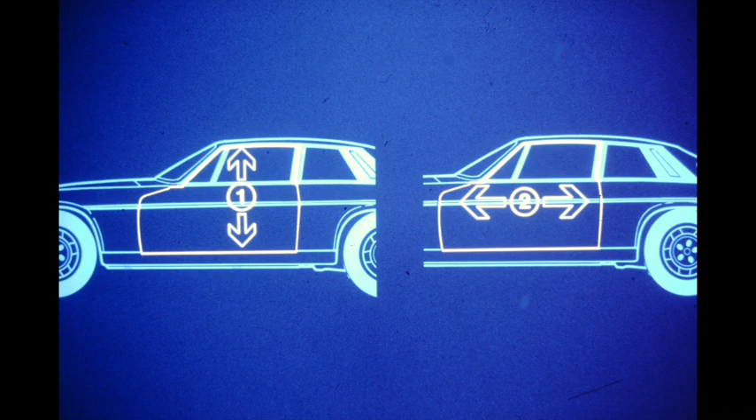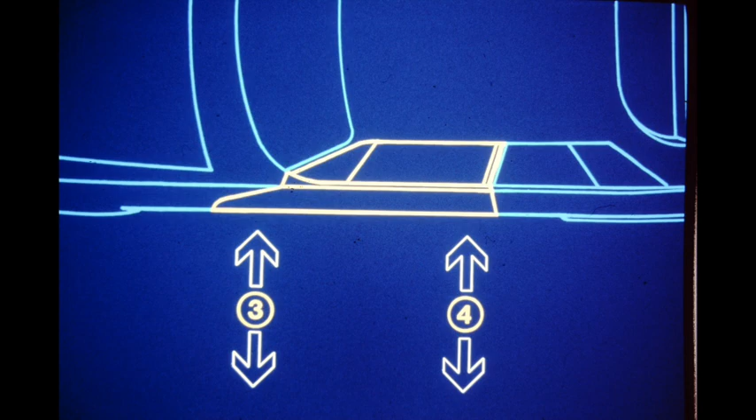Door seal condition and fit should be determined before adjustment. The sequence of adjustment for the panel is the same as that used on the XJ6. Vertical and horizontal positioning is accomplished first. Then the in-out and tilt of the door is set, first at the hinge, then at the striker. Remove the striker to allow freedom of movement. Retain the striker with a wire loop to prevent it from falling into the door post.

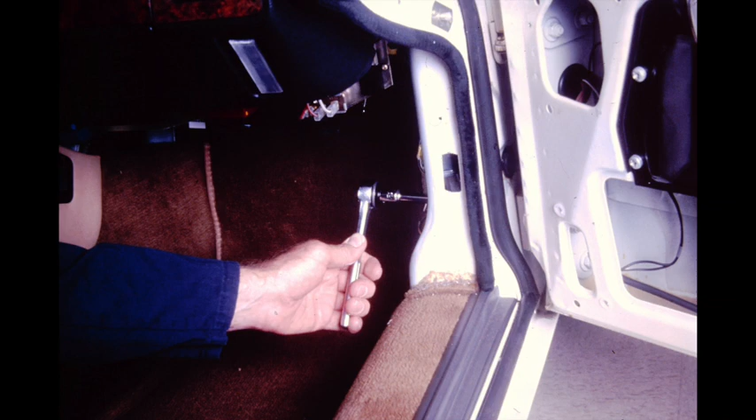Remove the interior kick panel to gain access to the hinge body nuts. Then loosen all 6 hinge nuts. Use a 3/16 inch sheet of wood between the base of the door and the rocker panel to position the door vertically. Then move the door horizontally until there is an equal gap at both ends of the door. Tighten the hinge nuts in this position.

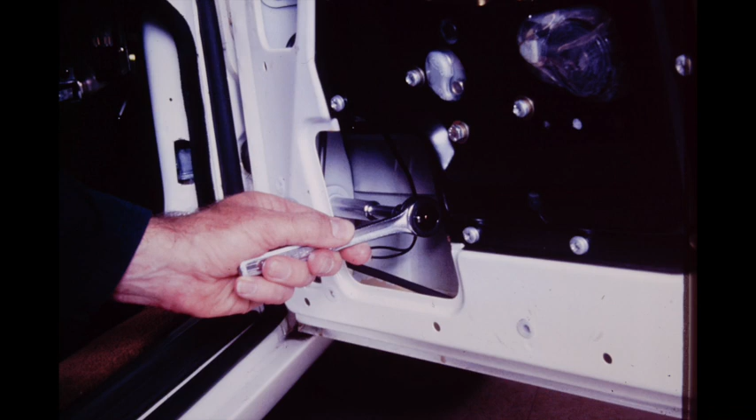Next, remove the door interior panel to gain access to the hinge door nuts. Loosen all 7 nuts, 4 on the top hinge, 3 on the bottom hinge. Adjust the in-out positioning of the front of the door matching the rocker panel and front fender while ensuring good seal contact. Then, tighten the hinge nuts.

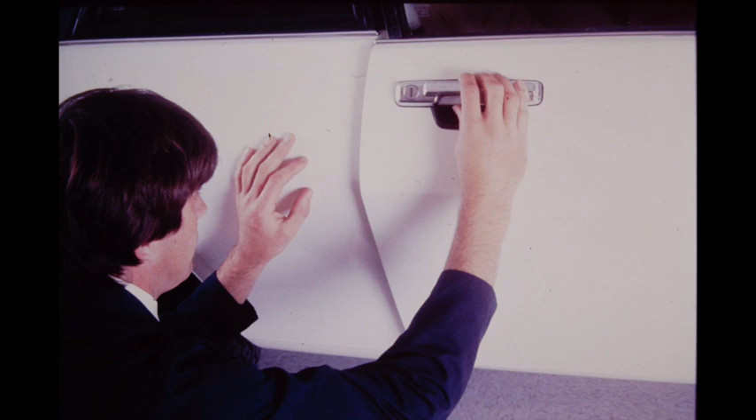Position the rear of the door by first reinstalling the striker and then adjusting by trial and error. The striker is adjusted correctly when there is no excessive opening or closing load, good seal contact, and a match with the surrounding panels.

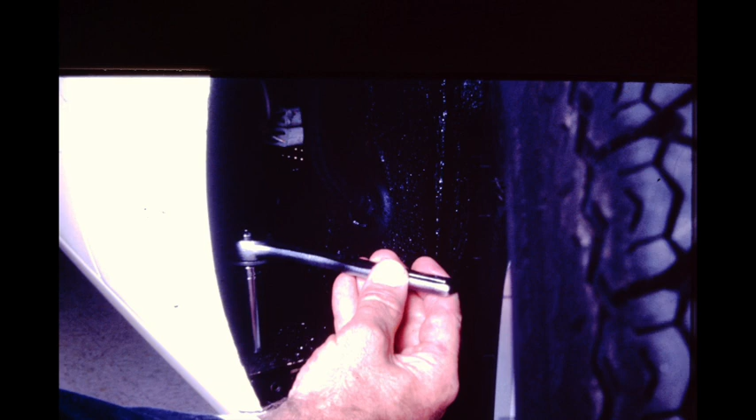Very limited adjustment for in-out positioning at the bottom of the front fender is available for matching the bottom contour of the door. 2 screws situated behind the rear access panel inside the fender locate and secure the fender.

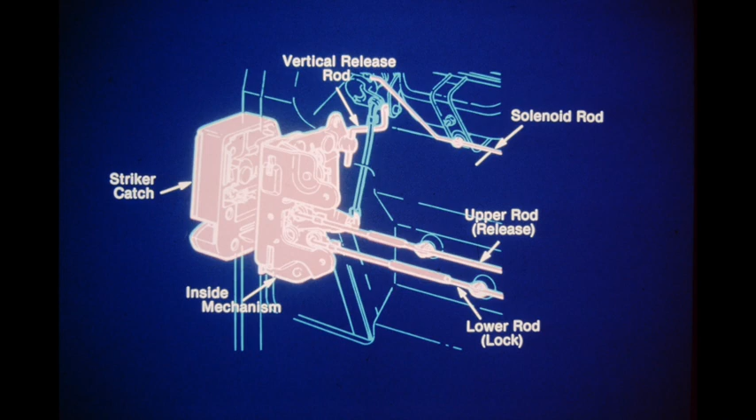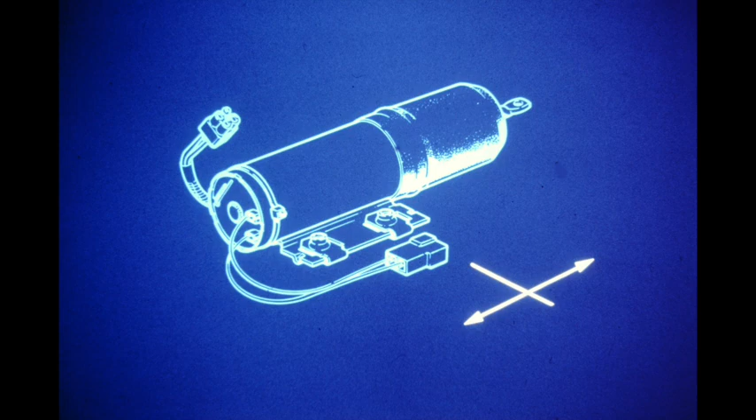Door lock adjustment on the XJS is identical to the XJ6 with one exception. When positioning the solenoid, the key positions are reversed. With the key fully clockwise, move the solenoid full forward. With the key fully counterclockwise, move the solenoid full rearward.

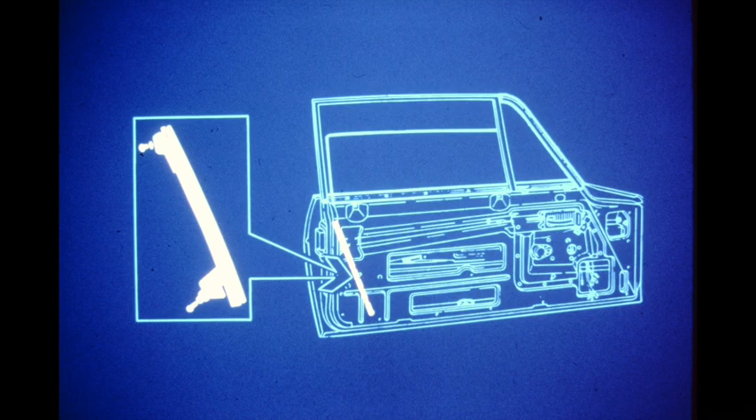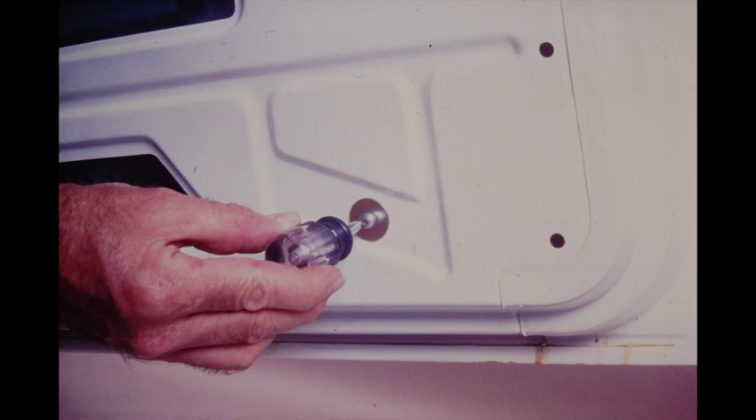Window adjustment is possible to correct for tight or loose fitting glass. Remove the interior door panel and fully raise the glass. Loosen the top and bottom rear channel adjusting screws. Push up on the channel and tighten the top screw. Fully lower the glass and move the bottom of the channel into light contact with the glass. Tighten the bottom screw.

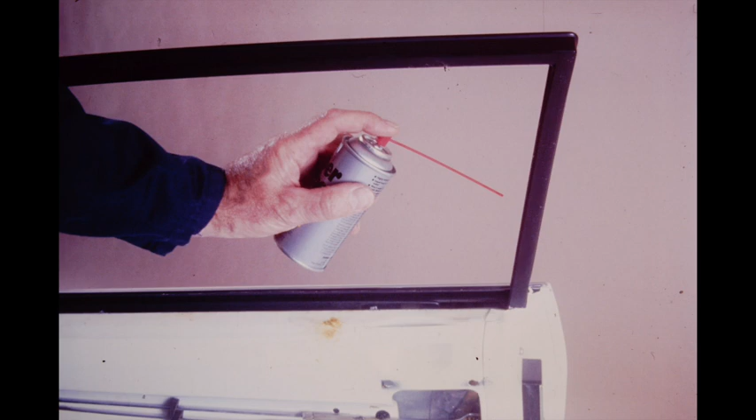Lightly lubricate the window channels with Teflon Super Lube or graphite lockease as required for smooth operation. Then, check the window cycle time. As with the XJ6, 1/2 of a cycle should take a maximum of 5 seconds. Be sure to consider the battery and charging system and the mechanical condition of the window regulator and motor when checking the cycle time.

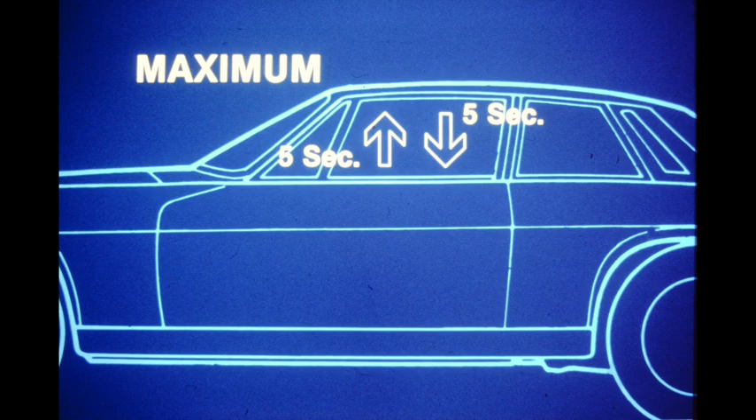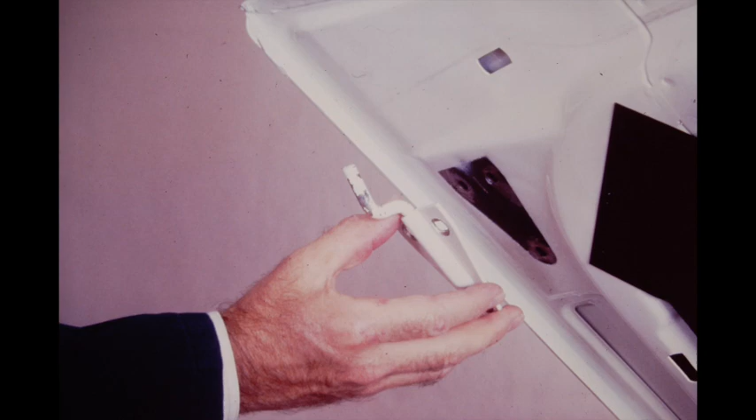Next, let's look at the procedures for adjusting the hood fit. Start by removing both catch pins. Through the grill, carefully loosen all the hood-to-hinge bolts to each hinge. Position the hood vertically and from side to side. When set, tighten the hinge bolts through the grill. Exercise care to avoid damage to the grill.

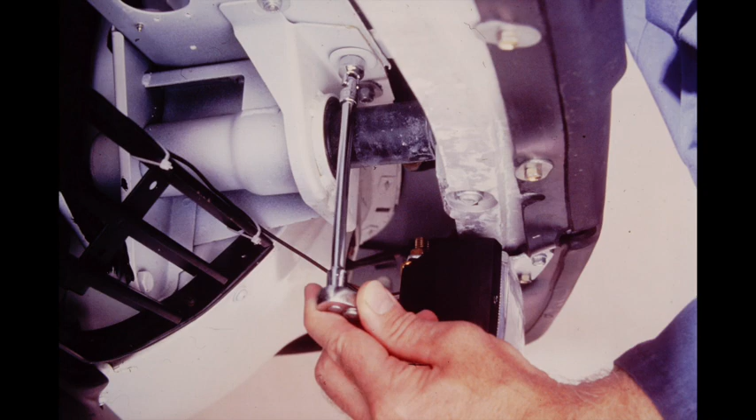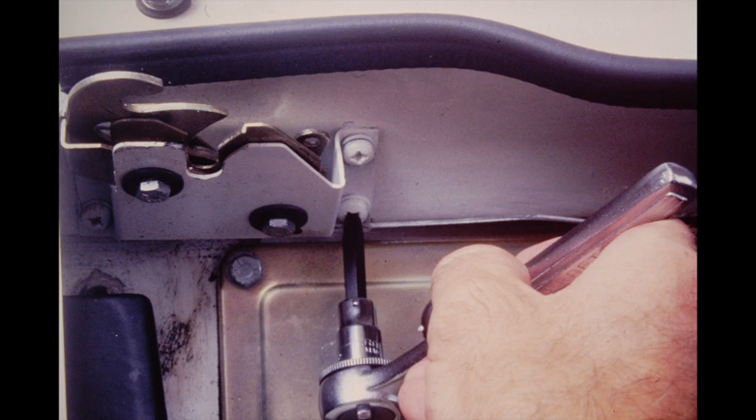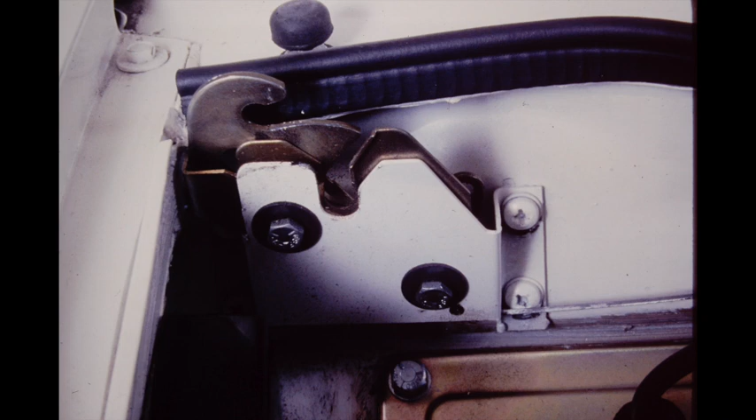Fore and aft positioning is accomplished by loosening the body-to-hinge bolts. Each hinge has 2 bolts. One is accessed from above, the other from below the bumper. Reinstall the catch pins and vertically position the hood at the rear by moving the 2 catch brackets up or down. Besides the 4 catch mounting screws, each catch can be further adjusted by repositioning the mechanism, which is secured by the 2 bolts with the large washers.

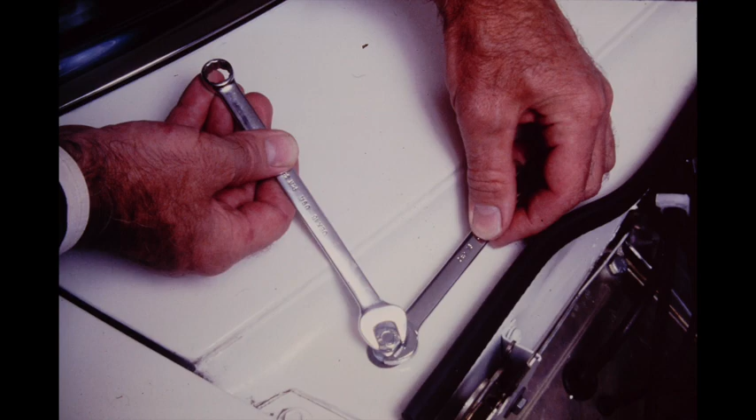Adjust the 2 pins on the hood to align with the catches so that there is no side-to-side hood movement when the interior lever is closed. Adjust the bump stops to eliminate any hood vibration at speed. The release cable adjustment should be checked and reset if necessary. Back off the side-to-side connecting cable first.

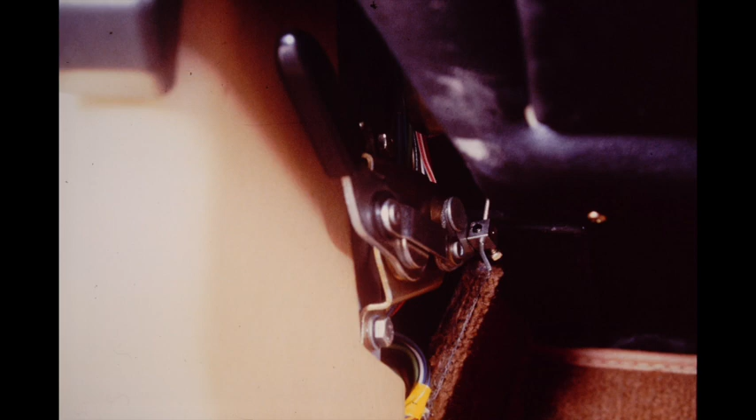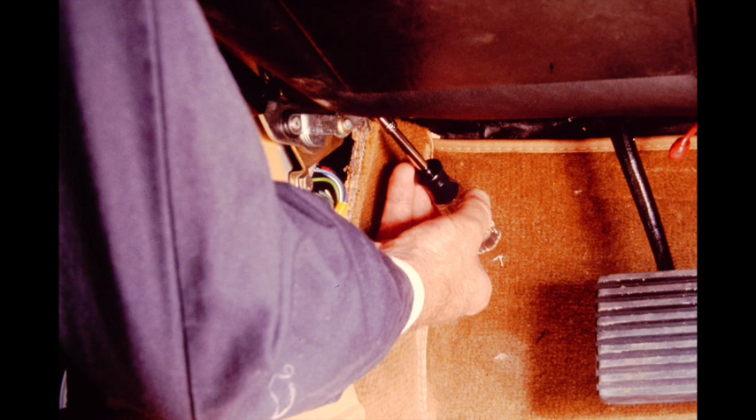With the hood open, set the interior release lever to the fully closed position. Adjust the main cable so that the left catch is fully closed. Then, adjust the side-to-side cable so that the right catch is fully closed. Recheck the rear vertical and side-to-side positioning of the hood and make additional adjustments as necessary. Exercise care during these operations to avoid damage to the finish.

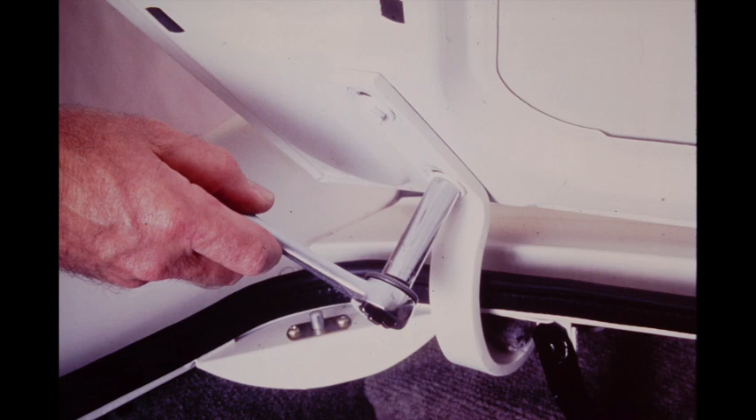As with the XJ6, trunk lid adjustment is best accomplished with the aid of a helper inside the trunk to loosen and tighten the hinge bolts while the exterior panel is positioned. Fore and aft and side-to-side positioning is set by loosening the trunk to hinge bolts. Front up and down positioning and tilt is adjusted by loosening the body to hinge bolts.

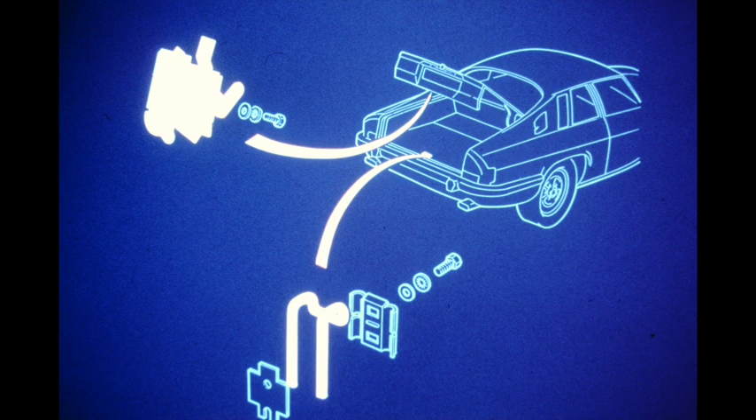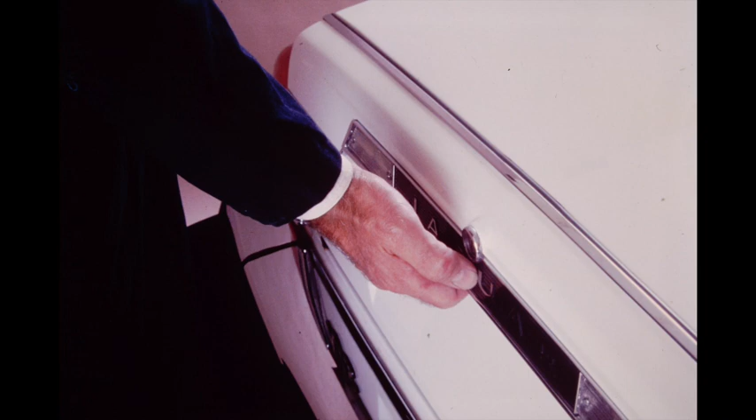Rear up and down positioning and release pressure is set identical to the XJ6 procedure. Adjust the striker and the catch mechanism and position the latch rod in one of the available holes to achieve trunk release at approximately 1/2 of the release lever travel.

A sophisticated electrically powered sunroof has recently been introduced as an option on the XJS. The tinted glass panel can be positioned in 2 ways: the normal open and closed, or rear pop-up. Inside the car, a manually operated sunshade can be positioned as desired. All the roof panel functions are controlled by a single switch located on the center console.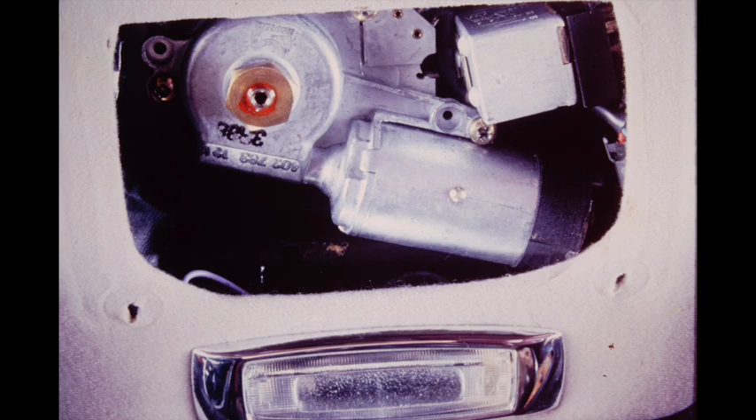The harness is routed up the right A post to the motor, limit switches, and the step relay assembly located under the headlining cover panel next to the rear view mirror. Adjustment to the sunroof panel is possible to correct for vertical front, rear, and side fit. Both sides should be even with the roof line. The front of the sunroof panel should be positioned 1 millimeter below the roof line, and the rear should be positioned 1 millimeter above the roof line when the panel is fully closed.

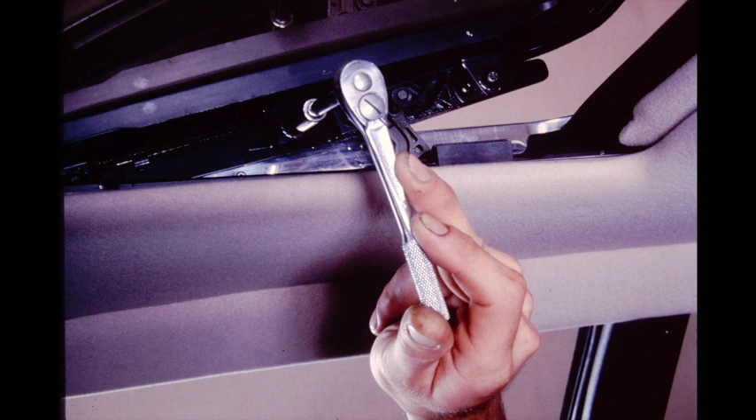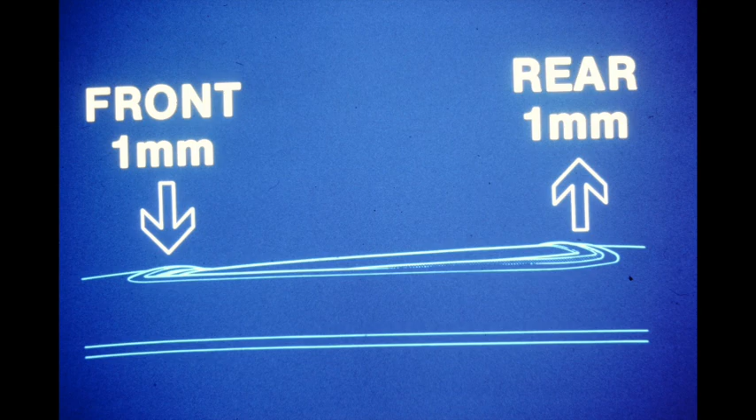Position the sunshade to full open and motor the sunroof rearward for access. Remove the finisher panel securing screws and move the finisher rearward. Then motor the sunroof to the full closed position. Loosen the 3 screws at each side of the panel and make the necessary adjustments as observed earlier. The panel is shown here at full tilt for clarity. After tightening the screws, recheck the fit and make further adjustments as necessary.

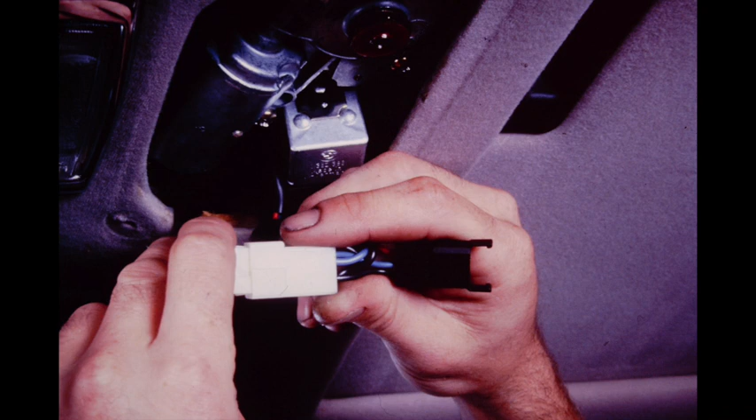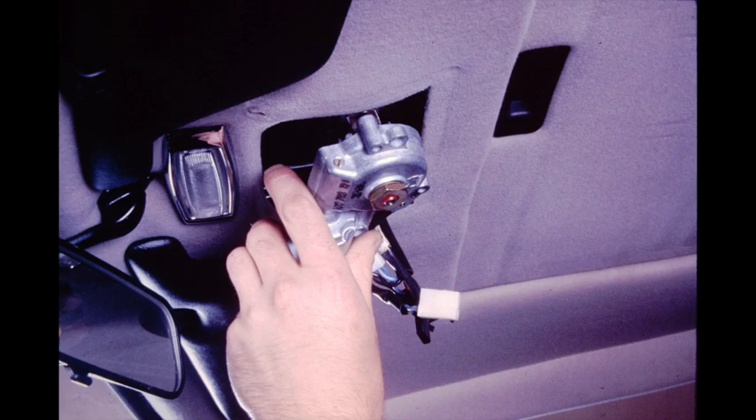This same procedure is used for removing and replacing the sunroof panel, except that the roof is motored to the full tilt position and the 6 screws are removed completely. Removal and replacement of the motor is easily accomplished. The roof panel must be fully closed before starting this procedure. After removing the cover panel, disconnect the feed block connector. Then, remove the motor, which is secured by 3 mounting screws.

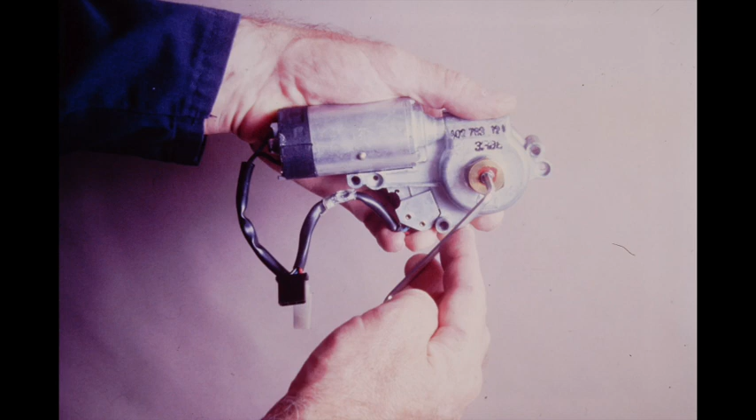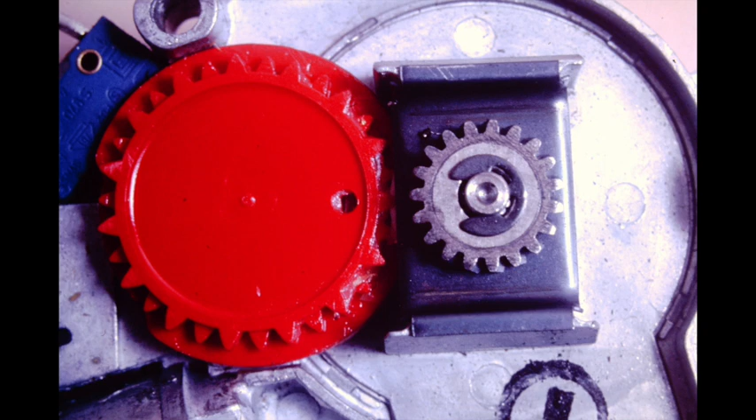Before installing a replacement motor in the reverse order, it must be centralized. Use the key provided to turn the motor to align the gears. Caution: the roof must be in the closed position and the motor must be centralized to provide the correct travel limits. The motor is centralized when the dot on the red gear is positioned on the center line of both gears as shown.

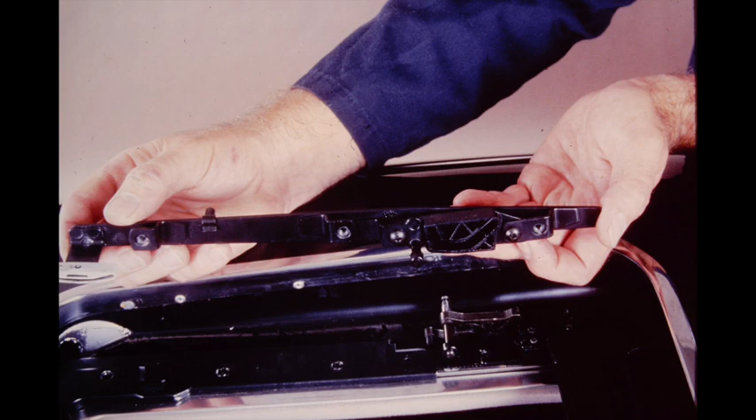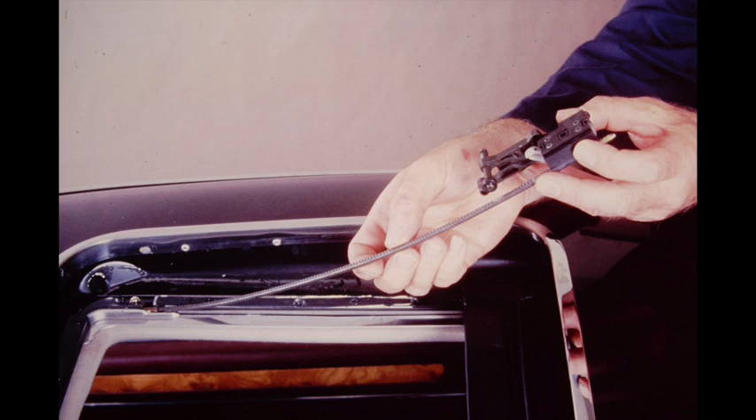The drive cables can be replaced after removing both the roof panel and the motor. Remove the upper slide pilot plate mounting screws and remove the pilot plate. The pilot plates are not transferable from side to side. Slide the carrier assembly out from under the guide. Then remove the upper guide. Carefully displace the block from the rear channel. The drive cable assembly can now be withdrawn from the tube.

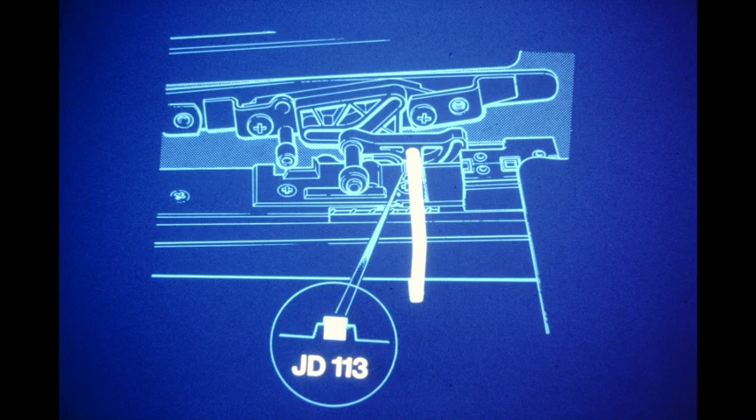The replacement cable should be thoroughly lubricated with multi-purpose grease before installation in the reverse order. When reinstalling the pilot plate, use the alignment key, tool number JD113 as shown, to set the pilot plate and block before tightening the screws. This positions the rack to fully closed. Caution: some of the screws are threaded into plastic nuts. Exercise care to prevent stripping.

The proud Jaguar handmade tradition lives on today in the XJ6 and XJ-S. Continual improvements, refinements, and the addition of new features make Jaguars more and more desirable. Technicians familiar with the procedures and techniques shown in parts 1 and 2 of this body adjustment series will help to enhance this image over the service life of the vehicle. This completes Body Adjustments Part 2, another Performance Masters service training program.